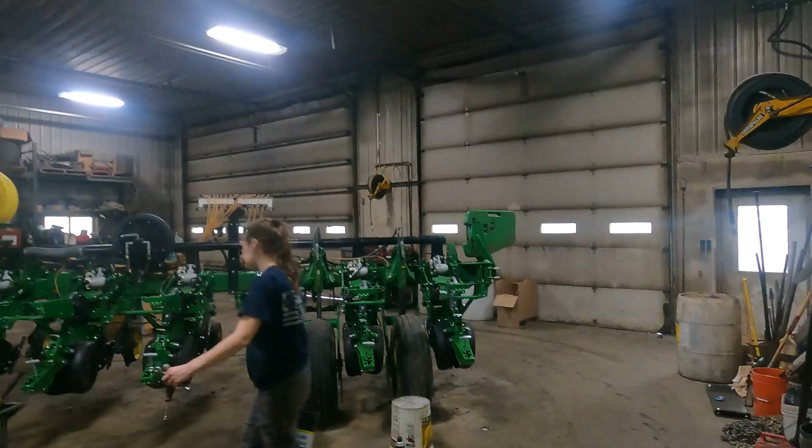Well, we just got back here. We're moving the frac tank, and we're getting a downpour right at the moment.

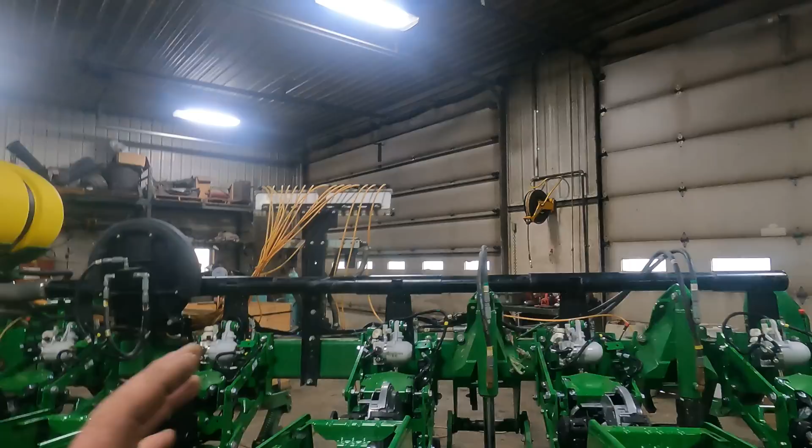We're inside here. So what we're doing now is we're getting ready to take off the fertilizer pump and this whole mechanism here. I have spent a good hour maybe going down through torquing these U-bolts. What a pain in the butt.

So we've got the row units torqued down, and I've got to go through and torque down the assembly here that holds the closing wheels.

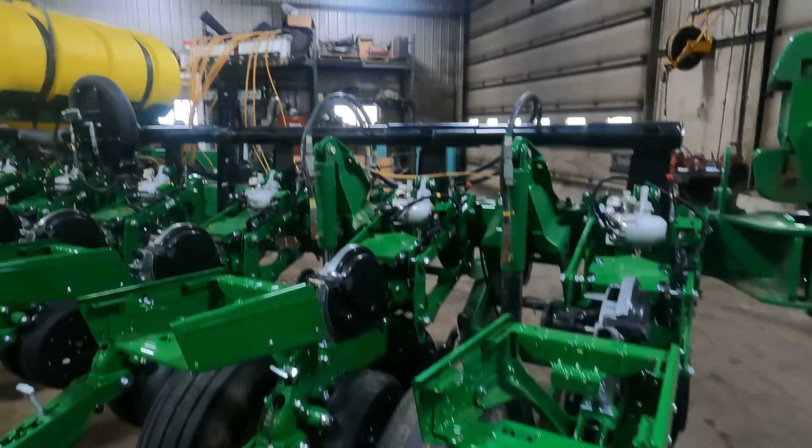So like I said, we're getting ready to take that fertilizer unit off of there so we can bolt on the variable rate unit, which is going to be hydraulically driven.

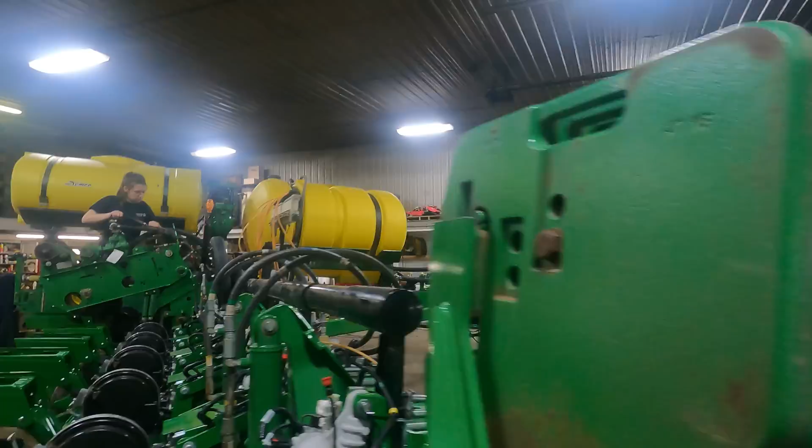Sarah's got the manifolds off that went to this old system here, and there was a manifold on this wing, another manifold down there on that wing there. Now we're saving these parts, like the manifolds. We'll save that pump. We're saving all of the check valves, everything like that.

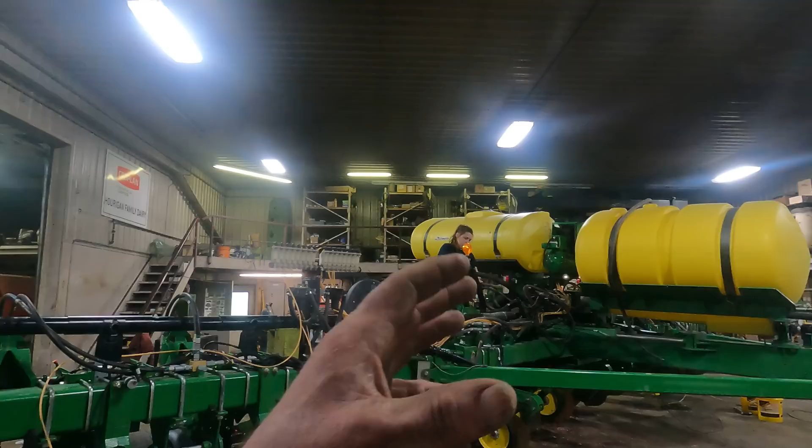Now, we were putting the row cleaners on last night, and we get down to the last box. I said, you know, we need to video the last couple going on. I get the camera out. Sarah opens the box up, the last box, and there was only one row cleaner in it. There was 2 per box. The last one over in there somewhere only had 1 row cleaner in it and only had 1 set of bolts. The other thing is there's 4 12mm carriage bolts that hold the row cleaners on, and they only packaged 3 per row unit.

I don't know what the heck that's all about, but of course I have not read any of the directions. I've just looked at pictures, and there's very nice color photos. I was going to dial up my iPad here and show you that, but I'll drop a link in the description. It'll be a PDF file for the actual directions on how this update kit all goes on this planter.

There's 434 pages on everything but the variable rate fertilizer unit, and then there's another 180 or 90 or something like that for putting the fertilizer unit on there.

So of course all we're going to do is look at a few pictures and try to figure it out as we go here, right? So we're going to be getting to the hard part here maybe later this afternoon, but like I said, we're holding on to these parts.

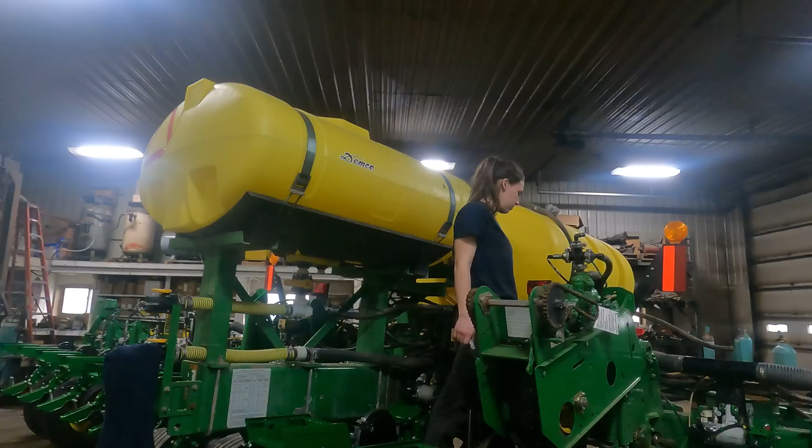Yeah. How do you like that fertilizer? Getting that stuff on you. Really fun, huh? Yeah. So, alrighty. We'll come join back with you in a little while here.

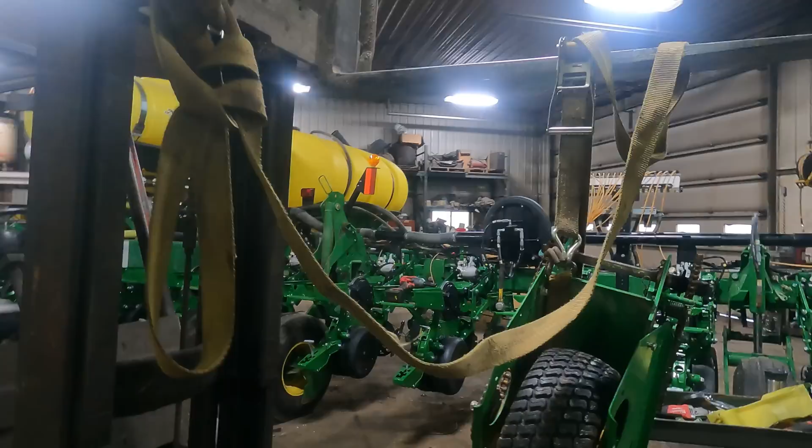Well, that's what this unit looks like off of there. We're just going to set a few things back in place. If this ends up going onto another planter, it's going to have to be disassembled like it is anyways, so we'll set that on a pallet and get it stored away.

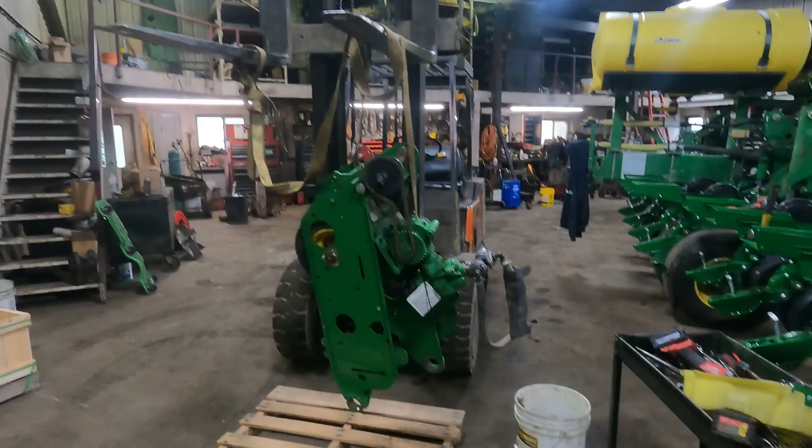Alright, things look a little different from when we talked to you last. We ended up getting the surface drive wheel fertilizer unit off, took the framework off of there. That's sitting on the pallet, and we've got the new one that's going to go on. We've also removed some of the wiring harnesses, took all the end furrow tubes off, and all the fertilizer tubes that went down to the fertilizer openers up front.

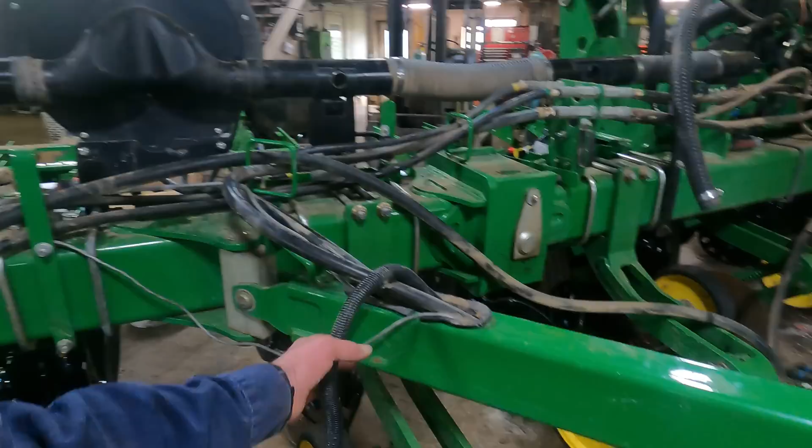We've got some more wiring to pull off of it. We've got this main harness here that goes down through this frame rail, and there's another one on the other side. Then there's the harness that goes up and plugs into a control unit — one plugs in on one side, the other plugged into a control unit on this side. We've removed both control units.

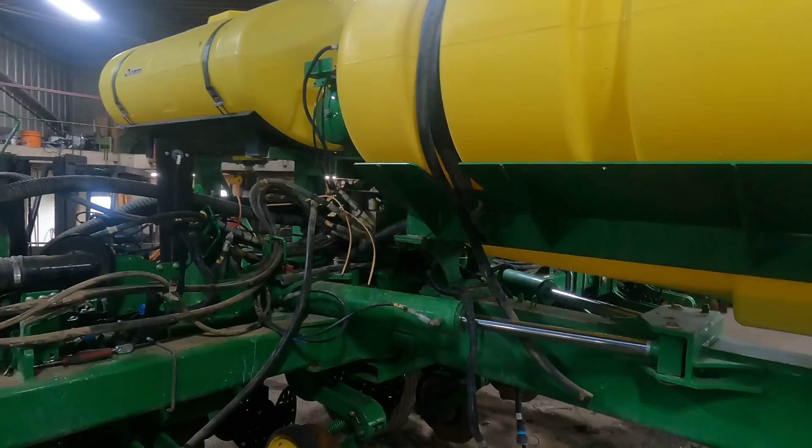However, we've got to figure out how to get that wiring out of where it is. It loops in and goes in with the hoses — they put the wiring in first before they put the hoses in, and you need all of that area to pull the wire harness out. So we're trying to figure out if we want to sacrifice the harness, or pull all the hoses out, then the harness. One option is to just cut the harness and pull the wires out, leaving the plugs on the other side.

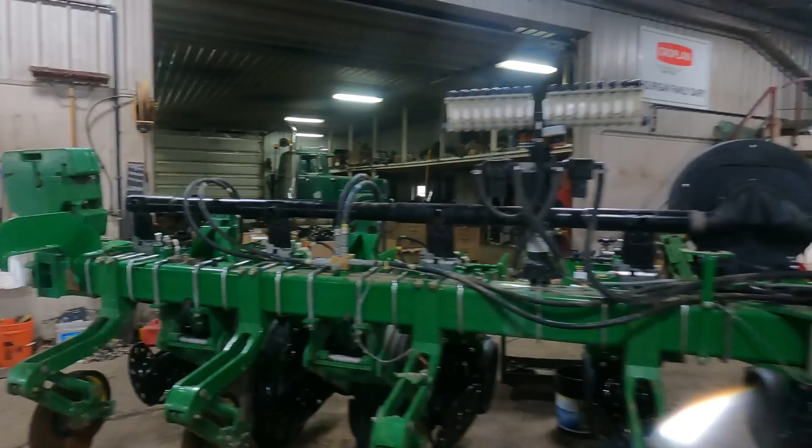So we ended up unloading all these pallets that had the hoses and the wiring and everything else in it. We've got everything all laid out here — almost looks like a flea market sale, huh? Yeah, this way we'll be able to tell exactly what we have rather than searching through boxes. We've got things counted out, we kind of know what's what.

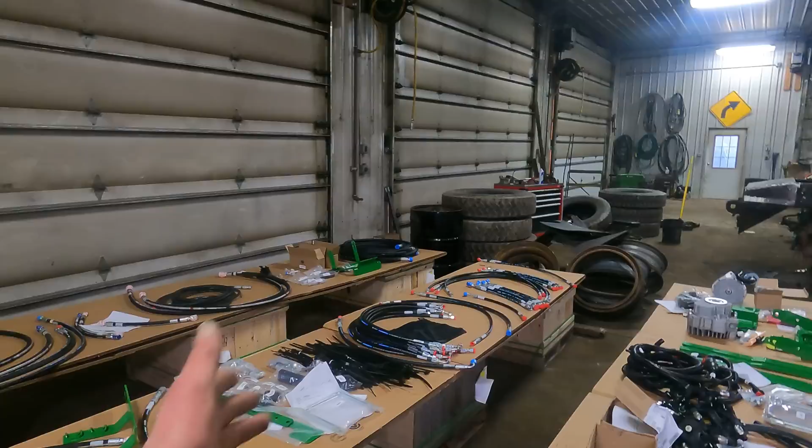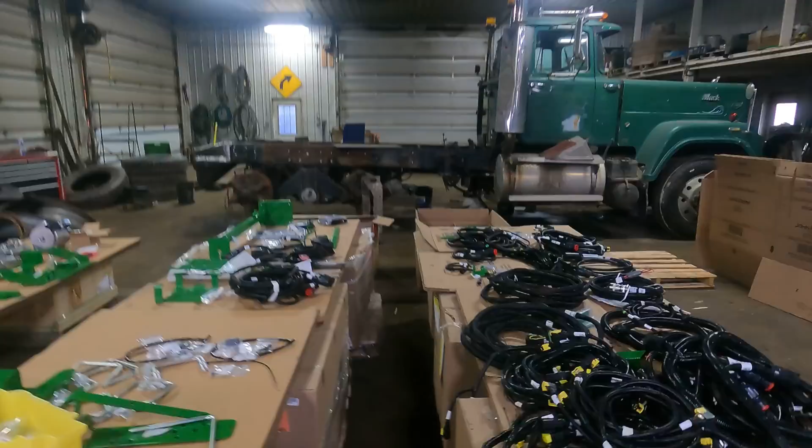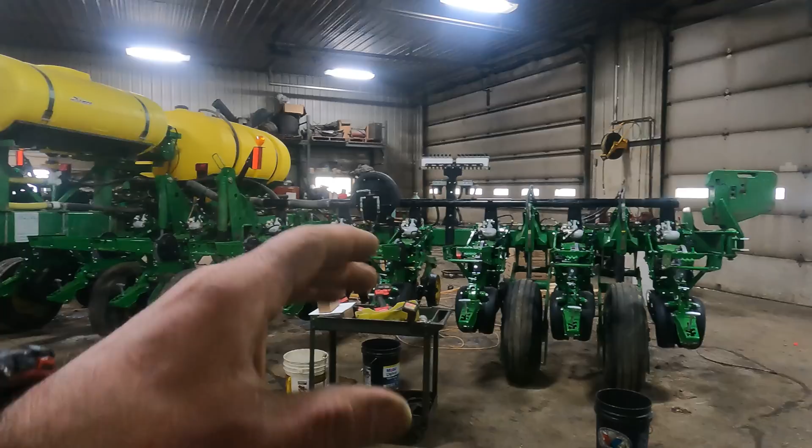The handy thing is all the hoses, everything's got a part number on it, so once we source the directions, we can line up the part numbers with the appropriate wire harness, part, hose, whatever. We've got a fair amount of work left here, but we're getting there, it's coming together. Once we get this fertilizer pump on there, we could decide what we're going to do with the old wire harness, then start plugging in all the new harnesses and new hoses.

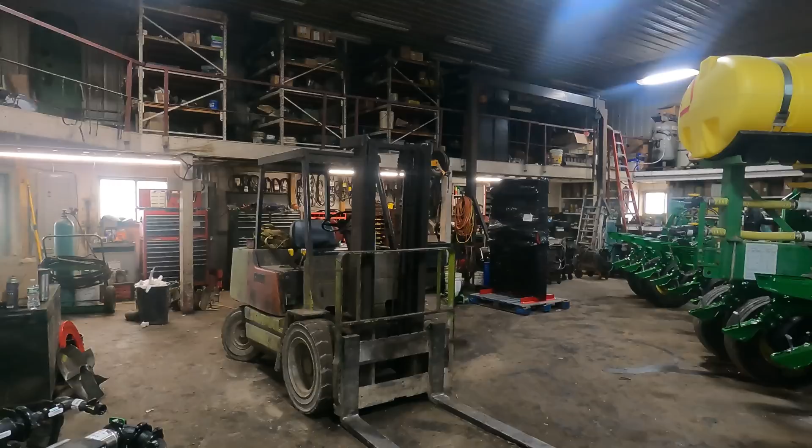Why don't we get this pump on there, and then we'll do an unwrapping event of that item on that pallet over there. I think some of you already kind of know what it is — I showed it a little bit in the last video, so we better get to work, right?

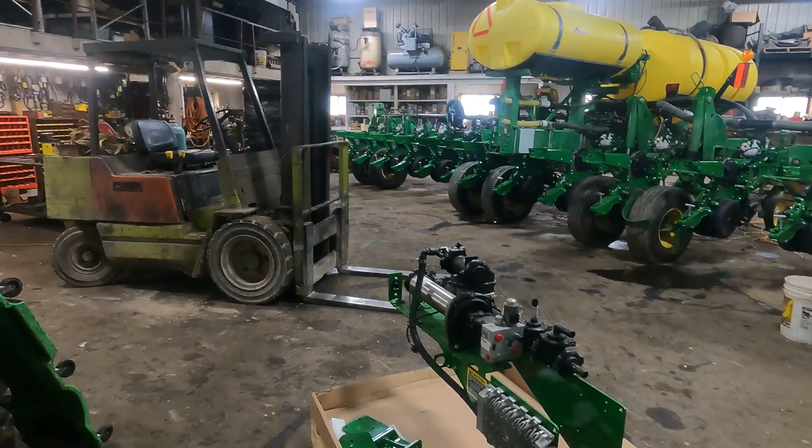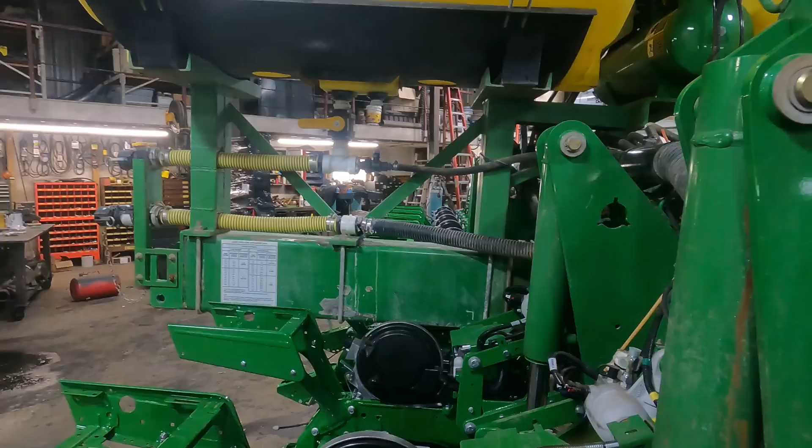Do you think we ought to source the directions on how that goes on there, or do you think we can figure it out? We haven't really sourced the directions too much yet, so we'll see if we can't get this on there. It's going to bolt right onto this frame here, bolt in here, and sit over top of the wheel.

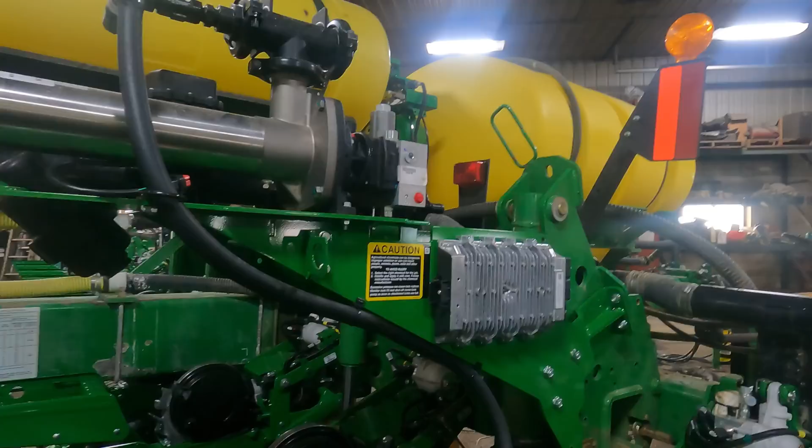Alright, we got this fertilizer unit all on there. That bolted up pretty easy. Seems to be a little flimsy though. I don't know how far out the hoppers are going to stick — they're going to come to about here. Hopefully they block this pretty good, or I'm going to be walking into this thing putting seed in. So that's going to be fun.

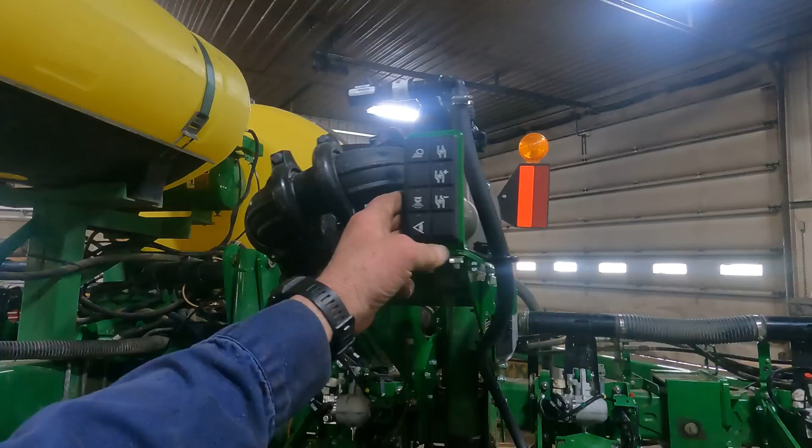We've got some various touch switches here. We'll have to figure out what that's all about once we get it fired up and running. It works out nice that it's right there, and the hoses coming from the tank can just plug into it and work like so.

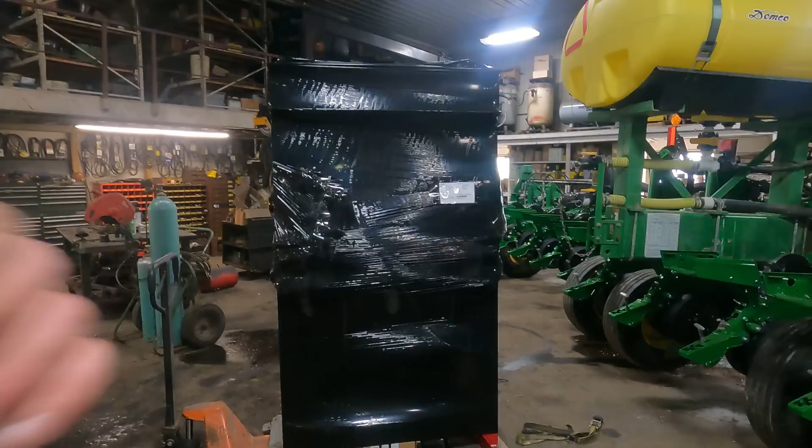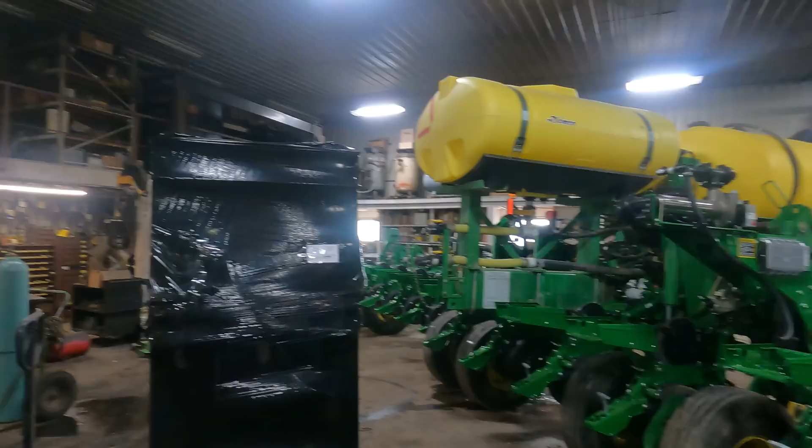So why don't we go ahead and open this up. Go ahead and drop a comment down below if you can figure out what this is. It's not too pressing to get this thing opened, we don't really need it right at the moment, but we'll go ahead and unwrap it, and then get back to working on this corn planter.

What do you think it is? Do you know what it is? I know what it is. You know what it is?

Get those yellow shears with it. Yeah, just cut these things. Remember where the pliers are.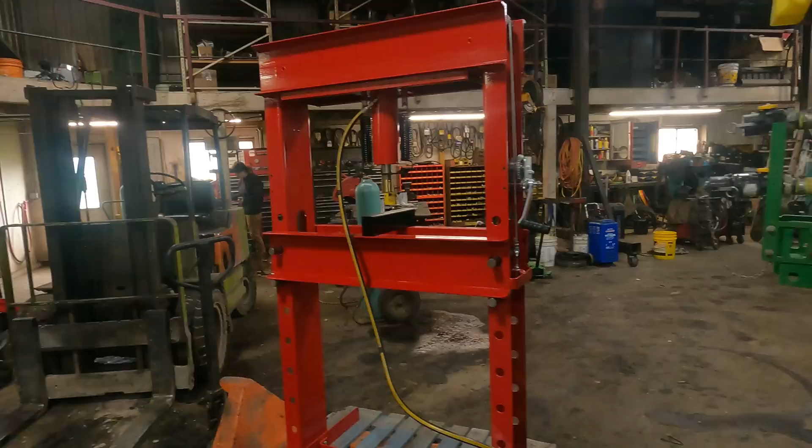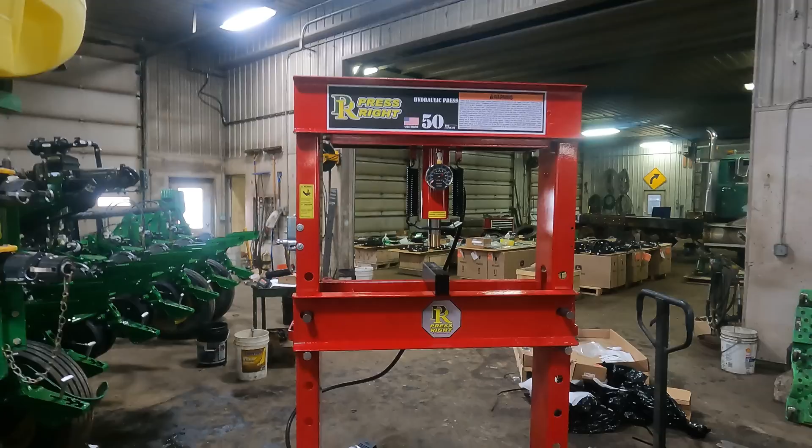Alright, so this is what we've got — this is a press, a 50-ton hydraulic press, foot operated. Now I wanted one that... what? Wow.

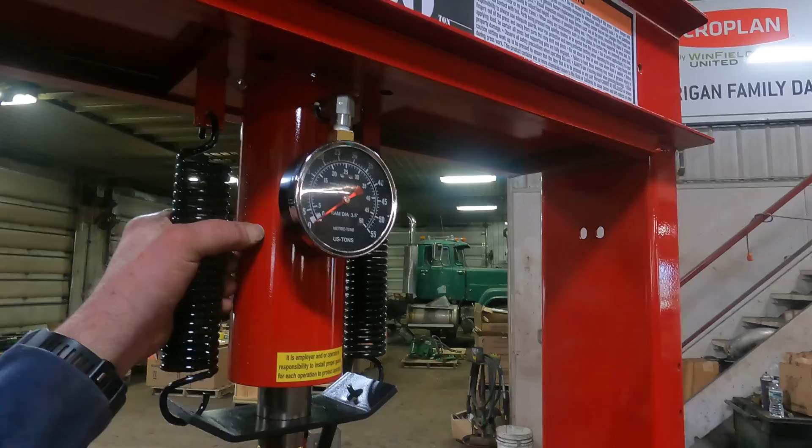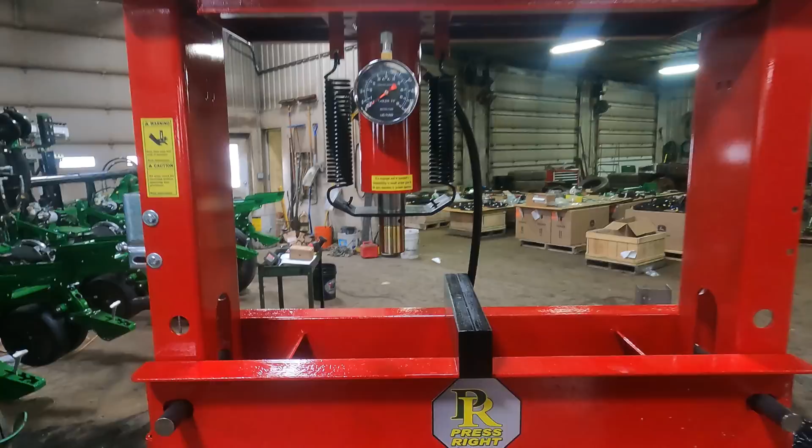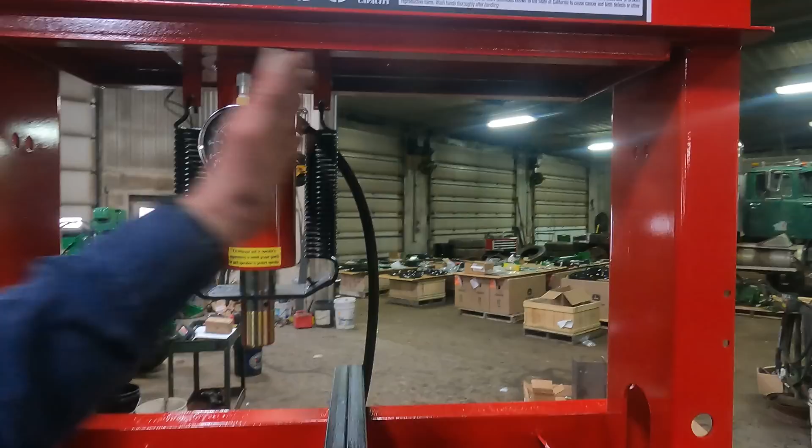I wanted one that was adjustable from side to side, and I was just going to tell you I couldn't find one, but this one is adjustable from side to side, which is handy if you have something really heavy and you're using all your might just to get it up on the deck. The last thing you want to worry about is whether or not you have it setting right. For some reason, I didn't think this one was adjustable — I thought it was stationary, which would be okay.

It's manageable, but it has an adjustable deck height. It has a crank winch on the side. Get some tension on that, pull your pegs, move them as you go, higher or lower. Now I've got to get some plates to set on the deck here to do various things, but we'll get that situated once we get this thing up and running.

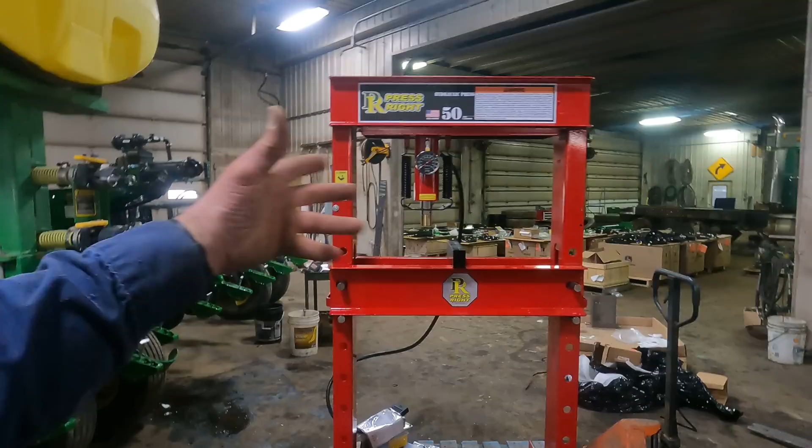What I would like to do is build a frame for it so that we can use the pallet jack or the forklift on it to move it out, maybe out in the middle of the floor if we're handling something heavy, and go at it that way.

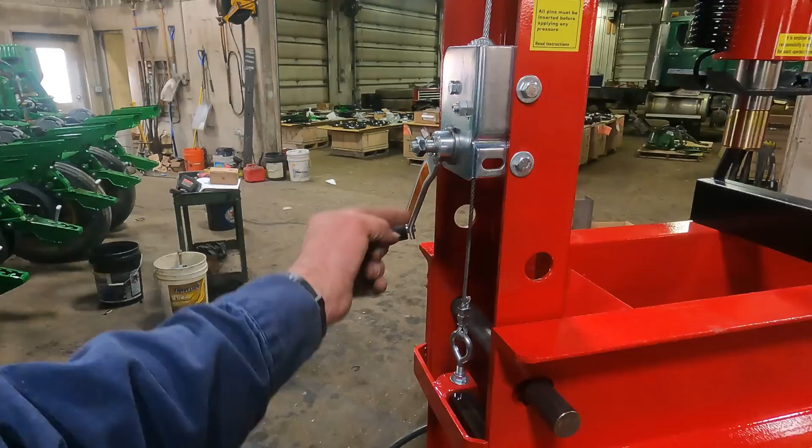Now what they should have done is mounted this handle backwards or put it in the box with the pump itself. The handle got injured during shipping here, and we're gonna have to take it off and adjust it in the vise. It's got some marring here, but these trucking companies don't really care what they're handling. They slam bang things in a pretty good hurry.

I ordered this better than a month or six weeks ago off of eBay. It was a decent price. However, they were waiting on some component and it delayed the delivery of it for quite a while. Now there were other options, there was the air operated hydraulic unit, but I figured the foot operated is going to be just fine.

Go ahead and run that foot pump there, will you? Now you might want to put it on the floor.

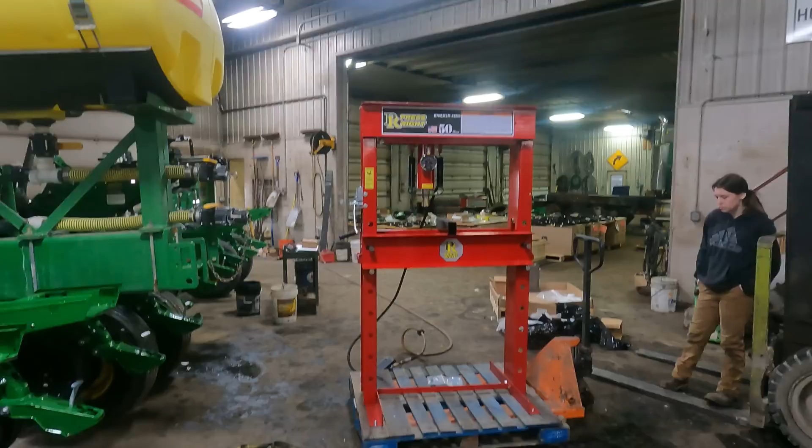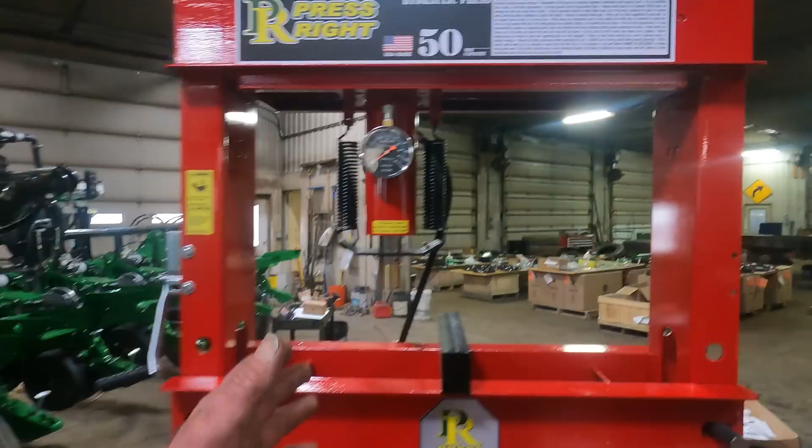Okay, silly me. Couple of things here. It's been so long since I've ordered this, I kind of forgot what I had. The one thing I didn't know was this top part was adjustable.

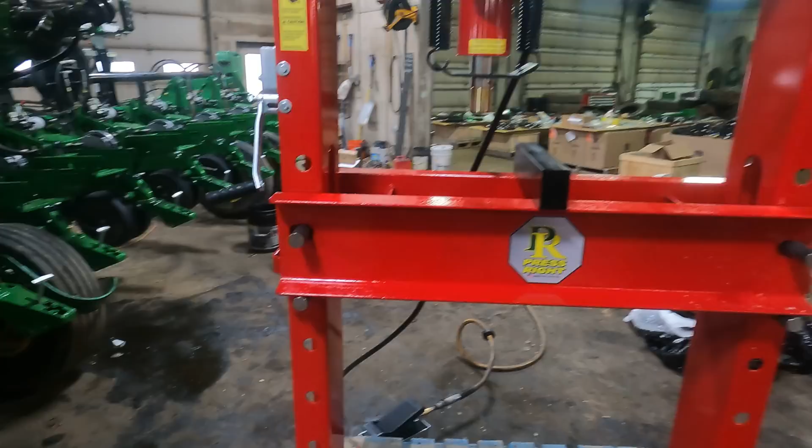When I opened it up and seen the foot pump, I thought what I ordered was one that had a pneumatic switch on the side running with air. I see the foot pump and I said, well, what we have here is a mechanical foot operated hydraulic pump, kind of like a bottle jack that has the handle to it, or you can hook air to it and run it with an air switch. I thought, just by looking at that quick, that we had a foot pump, but it's actually an air operated unit.

So we've got an air hose hooked up. I was actually going to go look on the internet and see what the description of this thing was and go from there. But I think the foot pump is a little better than a switch, because then you can use both hands to hold the object you're trying to press. So go ahead and hit that foot pump to activate it.

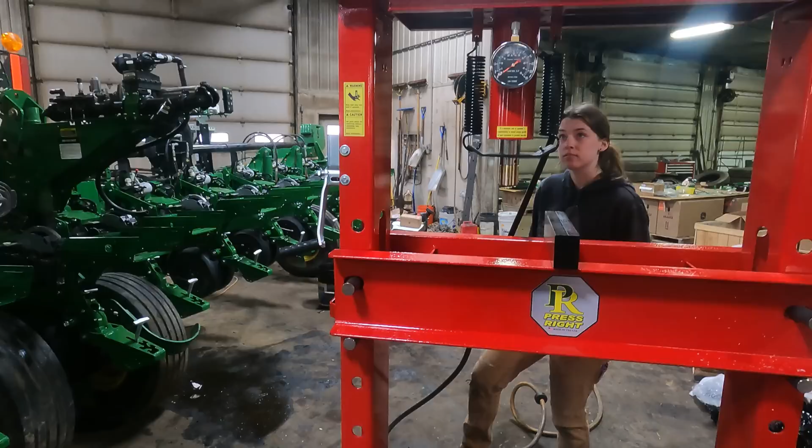So this is similar to a bottle jack here, so that's just going to activate, and run it the other way to release. And what you would do is actually have this on this side so you can read your gauge.

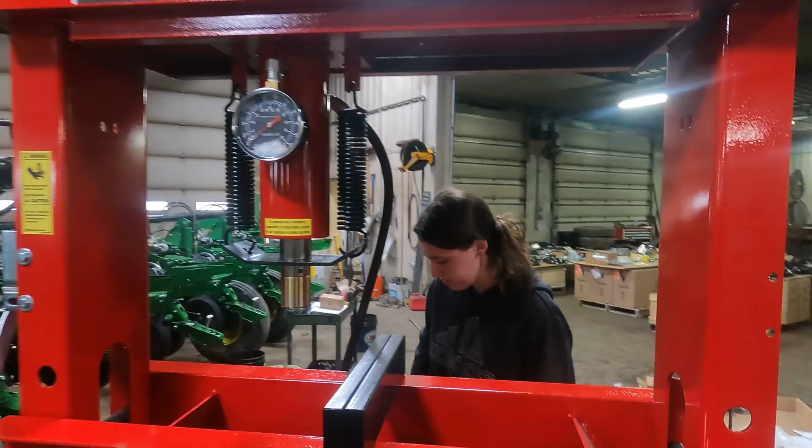So we're going to talk to this gentleman here, one of Cazenovia's top mechanics. He's come in to check on us to see how we're doing on this corn planter, and we've got to get a review from him quick here. So we're going to go ahead and talk to him, and we'll join back up with you in a little while.

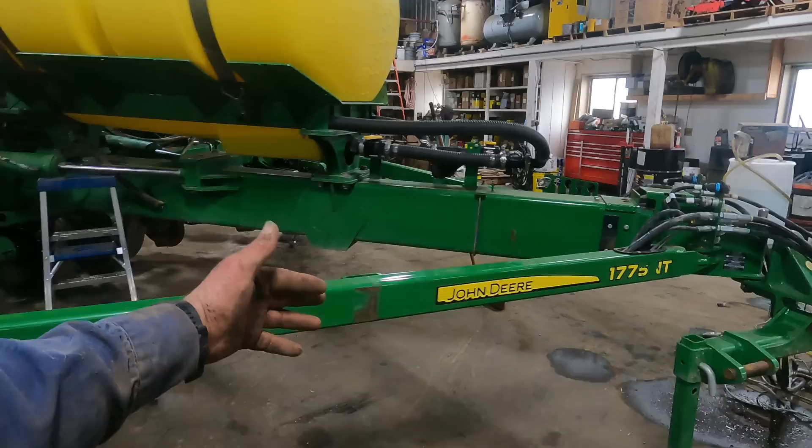Well, we just finished pulling the wire harness off of the planter completely. We'll show you what everything looks like in a box. Although we do have two harnesses running down through this tube on the outer side of this right hand frame rail and the left hand frame rail, and it comes up into the hitch bulkhead here, and it runs back through here, and it would have plugged into a control box over in there somewhere.

I can't exactly get this out through the frame right at the moment, and I don't want to go to the trouble of removing the hoses and everything to pull that harness out and then find out that there's something wrong and we actually need it. I'm not too worried about that at this point, but I don't want to go through all the extra work of getting it out in case we need it.

Now what we have to do is put these stainless tubes on for the fertilizer manifold assembly for the wings. So we're running side-by-side up front off of that pump that we just put on. We've got to start setting up our brackets and whatever. So that's what we're going to be working on now.

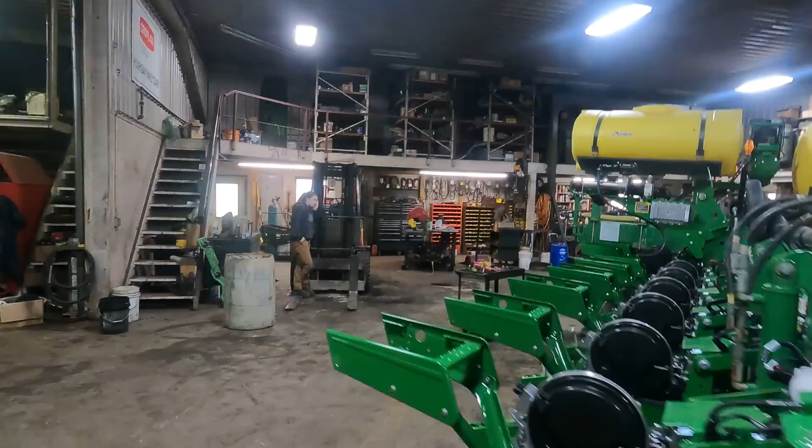We'll go ahead and show you what this wire harness looks like all neatly thrown in this box here. And that is a lot of wiring. But you can see that we have quite a bit of new wiring to go ahead and put on. So we're going to be working on getting some brackets mounted and start hooking in the fertilizer unit, and then we'll work into getting the harnesses put on for the row units, and then we'll start working on the hydraulic hoses.

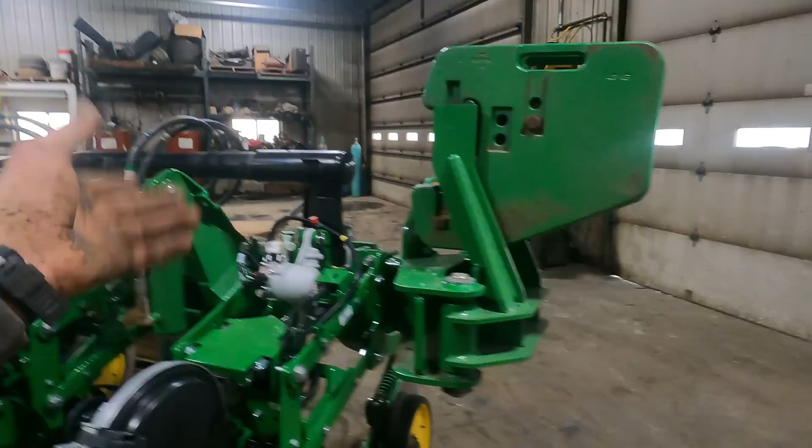But we got to pay real good attention to what we're doing from here on out. And I've got an iPad over there that I'm going to be using for directions. So we'll join up with you in a little while here once we get things setting into place, right?

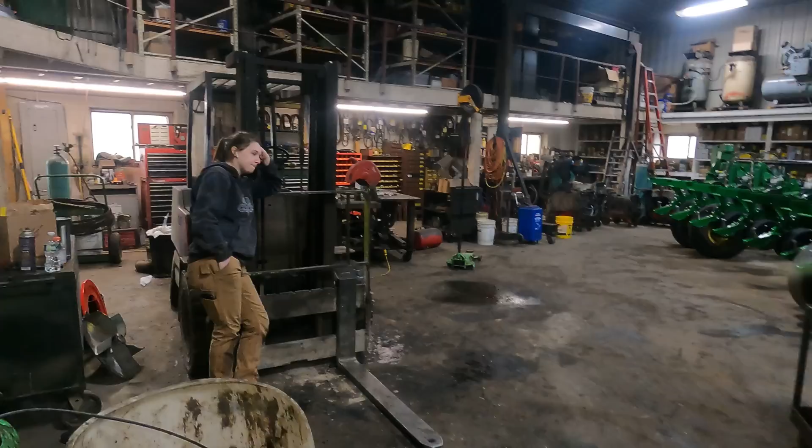Yeah, that wire harness was fun digging out of there, wasn't it? I'm fairly confident at this point that none of that old harness was needed, but we're going to soon find out here. So we'll join up with you in a little while here.

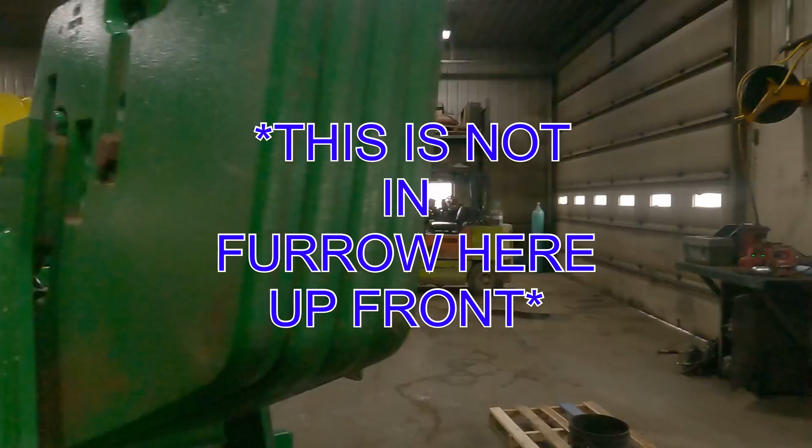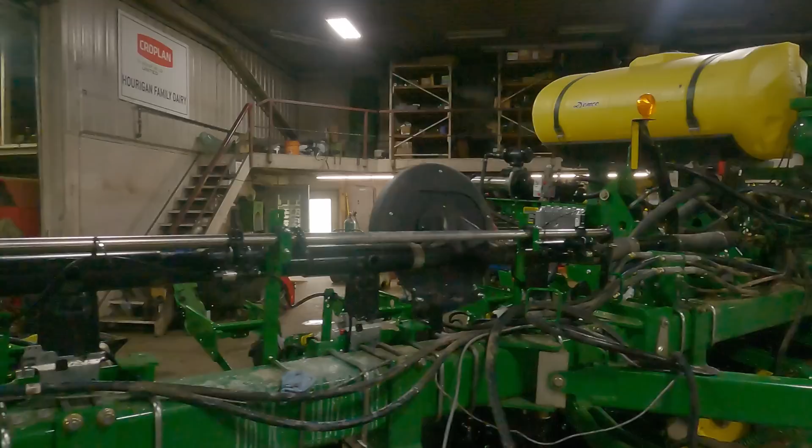All right, we are getting ready to call it quits for this video here. We ended up getting the fertilizer pump on there, and then we just got done hooking up all of the in-furrow fertilizer lines. There is a manifold for a pair of rows, so there's 8 of these modules on here, and then each row is going to be able to be individually turned on or off, whereas before the fertilizer on the in-furrow unit here was on all the time.

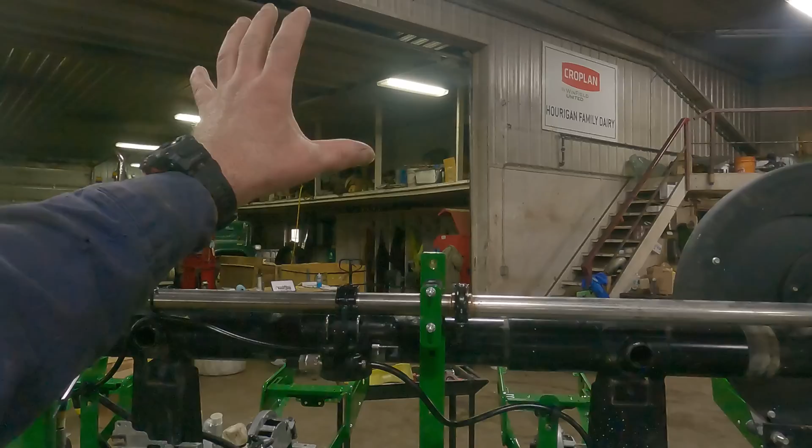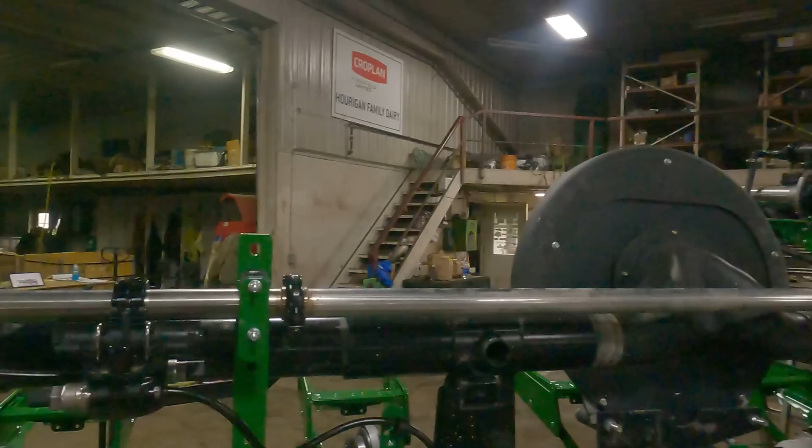Now we are running an in-furrow product back down through the seed firmers, and that product comes out of that front tank. That mechanism was mounted right here, a little electric pump. We're only putting about 4 gallons to the acre on with that. However, I had to take that off so that we could put this stainless steel line on here for the side-by-side, if you will.

So we've got to get that on. Like I said, we've got all these lines hooked up. Everything is kind of loosely tied for right at the moment because we want to see how things react when the planter folds and unfolds.

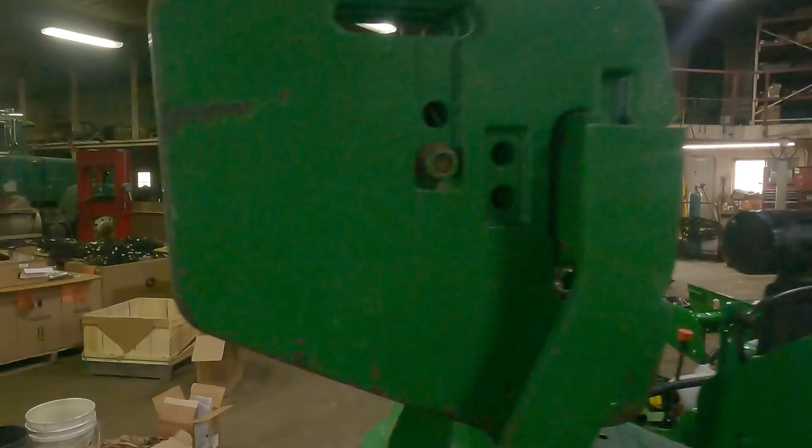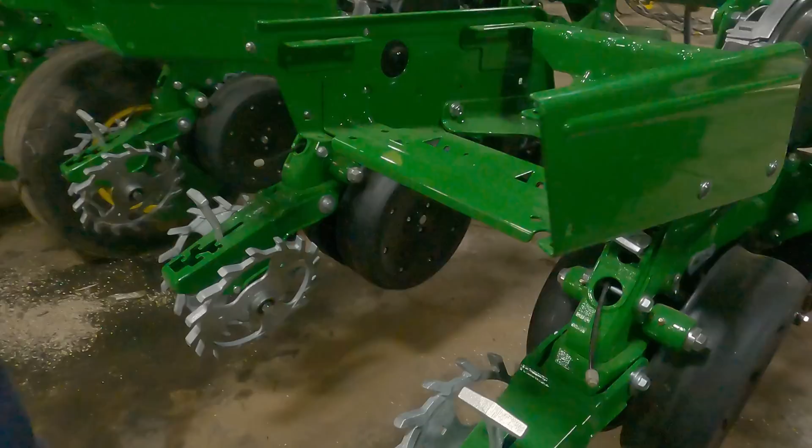We are putting brand new closing wheels on. Sarah's working on them right now. These were just delivered from Schaefer. We have run these - I think this is going to be the 4th year. The first couple of years we ran the wheels that have the plastic in the center. Those are no good, the all steel ones are better. The plastic ones had just the outside part of this wheel as steel, and the rest of the insert was plastic, kind of like the rubber wheels that come with the planter.

So she's got a few rows left here to do, and then that'll do it for the main heavy hard components, if you will.

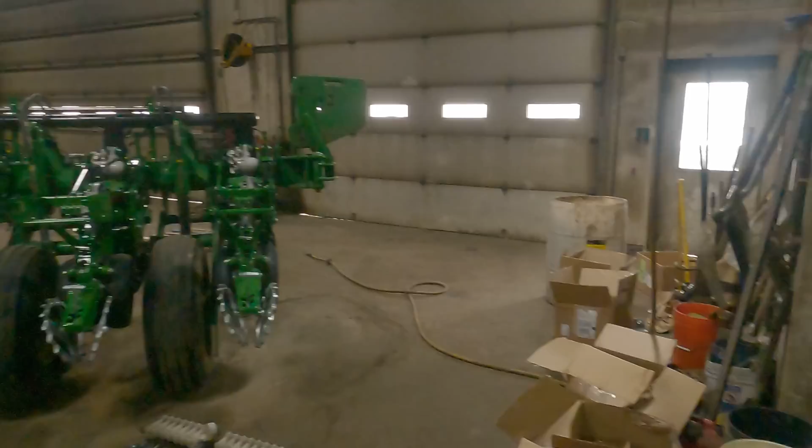And the rest of what we have to install on this planter is hoses and wiring. So we will catch you at the next video. I want to thank everybody for watching, and when we join back up with you, we will be doing the wiring and the hoses on the planter. And like I said, I need to find a new way to mount that in-furrow unit on there, whether I mount it in the same spot, just step it back a ways or what have you. But this is all of the fun that we have left to do here.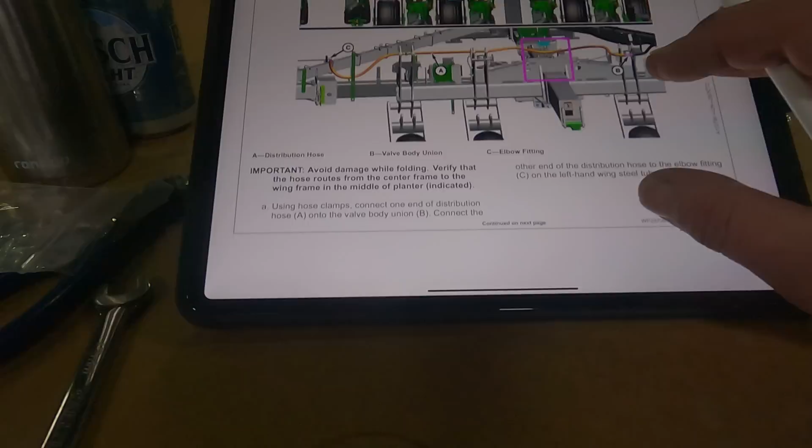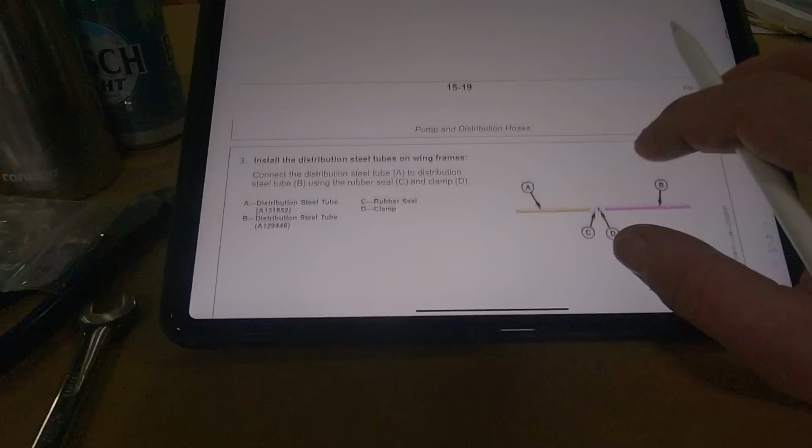So we're gonna have to dig into the directions here on the iPad, and what we are able to do is, because these directions are for a CCS planter, we can - I'll show you that it shows the tanks here. Well, here's the seed tubes here. We can go in here. John Deere's given us the ability to help them along with their directions. We can come in here and tell them, hey, this here is wrong.

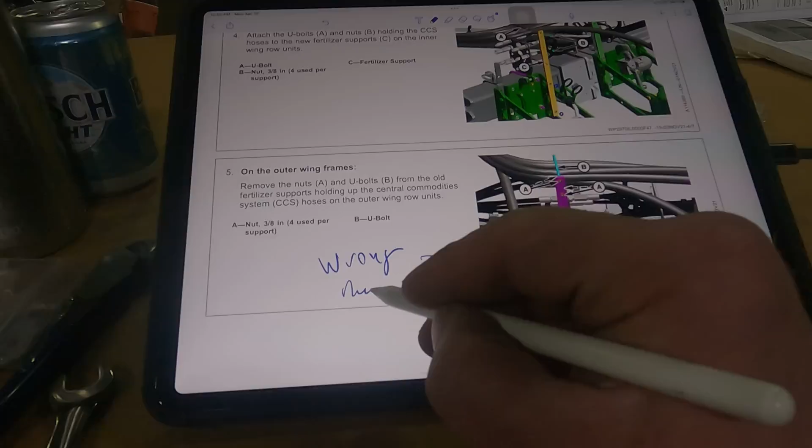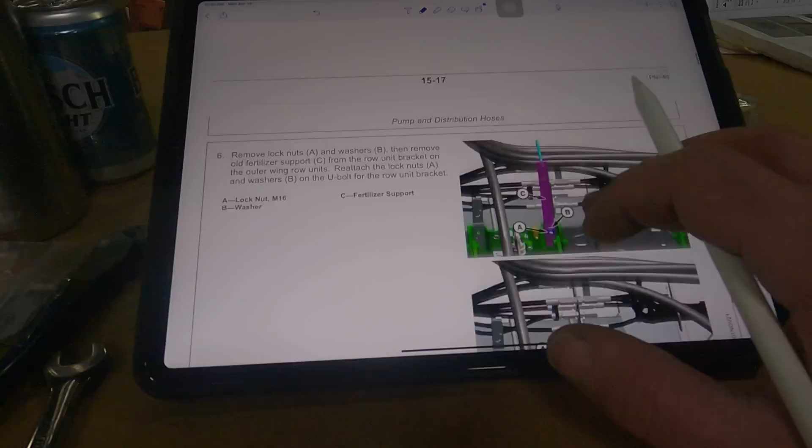Need redoing, and then I need to send them some pictures and they can go through and redo this. So that just allows us to change things as we go along here, as we find problems with what they have designed here. And I can kind of show you something. I've got to find the page.

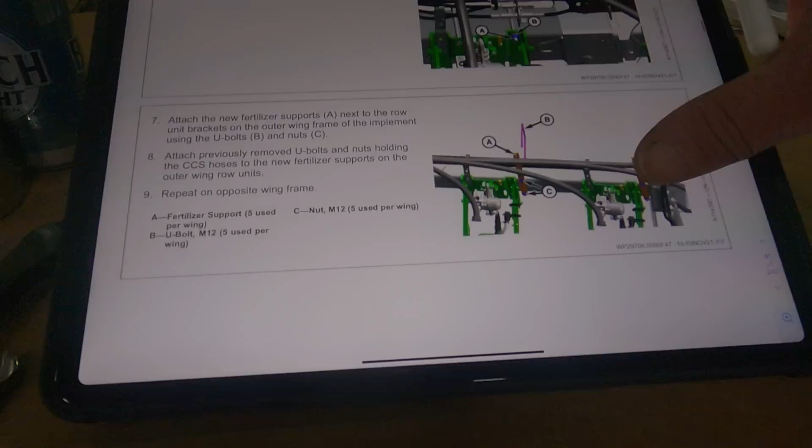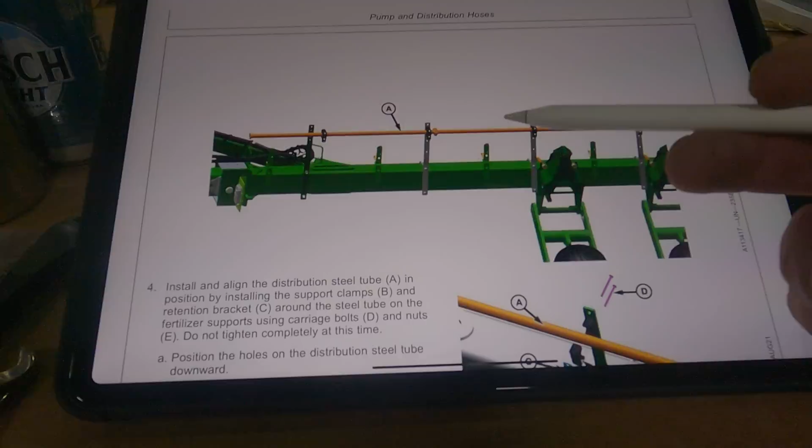It's where the stainless steel line is here, and they had it mounted to the back side of the toolbar, and they did not take into consideration that the vacuum tube is there. I'm trying to find - here we go, I think it's this next page here. See, they have this stainless line mounted on the back side of the metal support arms here that are mounted to the toolbar.

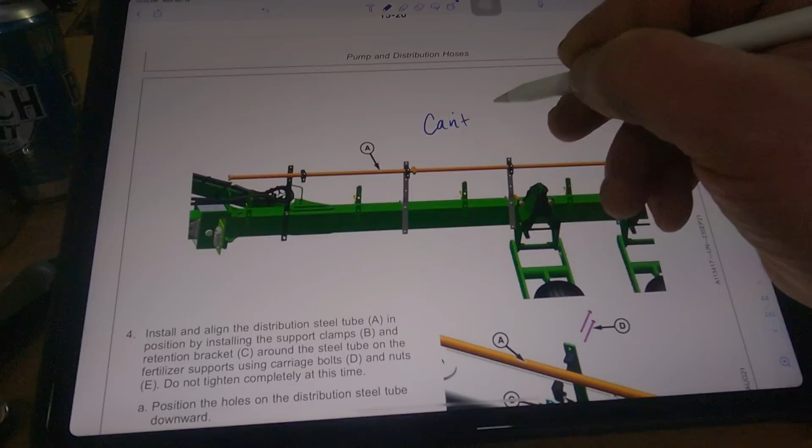Can't mount fert tube on rear. So we made a note there, and they'll change that.

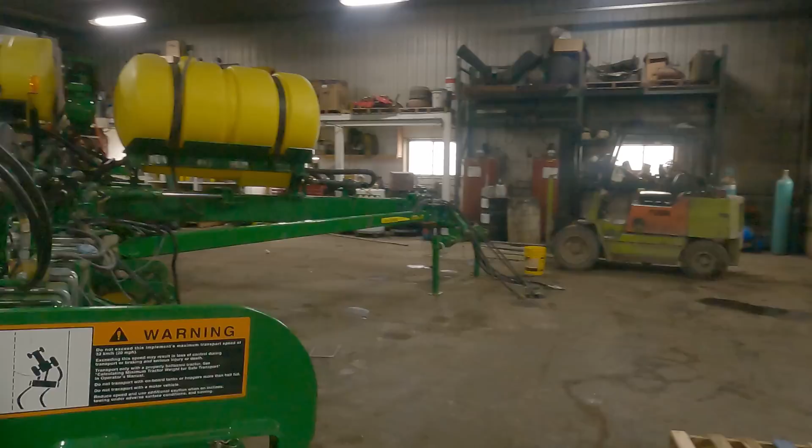And I'll show you the reason why that doesn't work. On their illustration, they don't show - and I got an idea when they were putting their unit together, they didn't have the vacuum unit on the planter. Now, they showed this here mounted to the back side. Well, if we had that mounted to the back side, this little valve assembly here would be right where the vacuum line goes. So we made a note, they'll change that for the future kits that get put together.

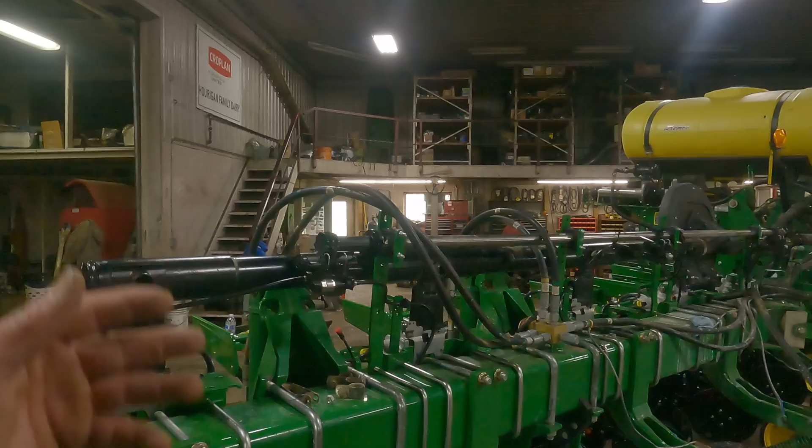And if somebody was doing things in order in which they need to be done, they would have this all on there, and then they would realize that their vacuum tube is in the wrong spot.